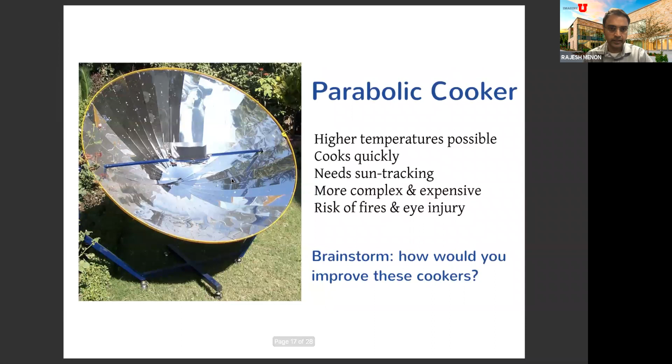The idea is that a Fresnel lens cooker is similar to the parabolic cooker. So if you recall, we had this where you were focusing all the light to the focus of the parabola, which we'll talk about later. Here, the Fresnel lens does the same thing in transmission. So with the parabolic cooker it's in reflection, like a mirror, but here it's in transmission. That's the only difference, so sometimes this is easier to do than the other.

Otherwise, the specifications are roughly the same. You can get very high temperatures very quickly, it cooks quickly, and you need to track the sun again, just like the parabolic cooker. It's relatively complex. I wouldn't call it expensive—these things are relatively cheap nowadays—but there's risk of fires and eye injury.

So I want to spend about 5 minutes or so talking about some basic heat principles as we try to consider some of the technical challenges involved in solar cookers.

Can we use a thermoelectric generator instead of a battery for rotating the motor? Yes, I believe so—anything that can generate power—but that's a good question.

Okay, so the first thing, of course, in a solar cooker is we need to somehow achieve heat gain. We do this with a greenhouse effect. So essentially, sunlight comes through—the visible light, which is light photons with energy higher than infrared—passes through this transparent cover and gets absorbed by this dark pot in this case. Of course, when something absorbs light, it also re-radiates. This is a black body.

You've learned this in high school physics. So this re-radiation happens at longer wavelengths, infrared. Visible will be shorter wavelength, higher energy. Infrared will be longer wavelength, lower energy. We'll talk more about this as we go along.

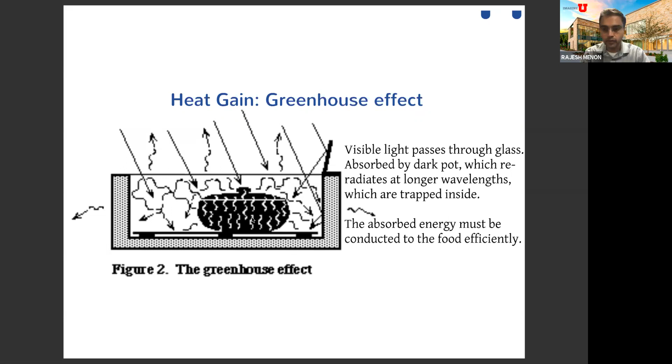The other thing that's important is how the light is entering the system. This can be thought of as heat gain, where the energy is entering this closed system, and the orientation of the glass is important. So if we consider these two situations, one question I can ask you is which box will receive more sunlight? If we were in a class, I'd ask you to discuss, but in the interest of time, and since it's probably a little too simple for you, I'd assume you all know that box 2 will receive more sunlight just because it has a higher...

So the way you should think about this problem is that the amount of light entering the system is defined by the aperture of the system, right? So that's the aperture of the system. Now, of course, there's an angle between the ray of light coming in and the aperture, so you have to project the aperture to be perpendicular to the ray, which will be this line right here, okay? And that will give you essentially a cosine theta factor.

And that was the area that is collected relative to the box here. If you correct for that by actually putting in an aperture, you're essentially collecting more light just because you're avoiding the cos theta factor. So you can kind of see this in this picture.

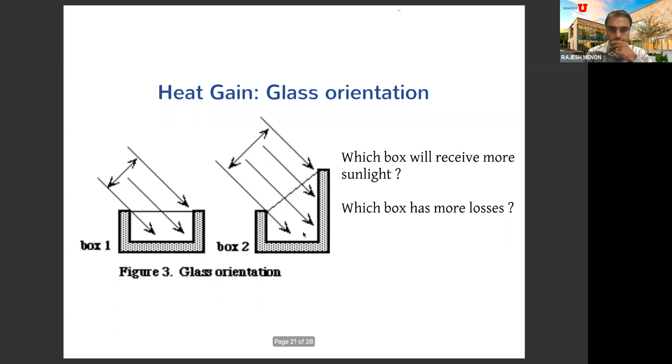By placing a reflector, you're essentially increasing the, let's call it, virtual aperture of the system. So you're essentially getting more of the light to come in, right? That's a little bit obvious if you think about it. And I can put two of these and get even more of the light to come in and so on. So the reflectors essentially increase the effective light capture area of the aperture, okay?

I want to take - well, I'm going to leave this as a homework problem because we have a lot of ground to cover. So one of the brainstorming questions is, think about this concept where you are essentially applying very simple optics like mirrors - just a reflective surface to enhance the amount of light you're collecting. Are there ways you can come up with to increase this gain? I will leave this as an optional homework problem for you to think about.

As I said before, the loss of the system is also very critical. So we have to think about the mechanisms, and there are three as we talked about.

There's conduction. The way you might lose heat by conduction is because this pot is sitting on a plate here, and that's touching the pot. So it's going to conduct some of the heat onto this plate, and if this insulation is not very good, it can conduct it out of the system. That's conduction - when things are in contact. So the absorber plate has to be well insulated from the bottom of the cooker, for instance, to prevent that conduction loss from happening.

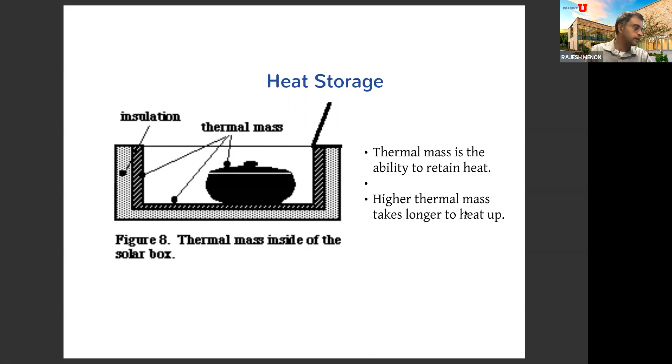The last thing I want you to think about is materials requirements. This is a very simple example, but all these concepts are equally applicable to more complex systems, so I want you to think about it even though it might seem trivial.

There are different ways to think about materials. One is structural materials—how do you hold the whole thing together? Can it be heavy, or does it need to be super light? Does it need to be resistant to water, humidity, snow, or other weather conditions? There are lots of options here.

The other thing is insulation. How are you going to insulate whatever's inside the solar cooker from the outside world? It can't be very expensive, and is it locally available, for example?

For the transparent material on top, you want it to be transparent to visible light but still retain the infrared. There are lots of cheap options—glass might be too heavy, so you might want to use plastics and things like that.

Moisture resistance is very important, because anything humans cook will emit water vapor. So there will be moisture condensing inside this chamber, and you have to make sure that doesn't affect whatever material you're using.

All of this is a highly interdisciplinary problem. As an engineer, you cannot just think about optics by itself—all these other things have to be considered in addition to cost and consumer preferences, when you really want to make something that will be adopted by the world.

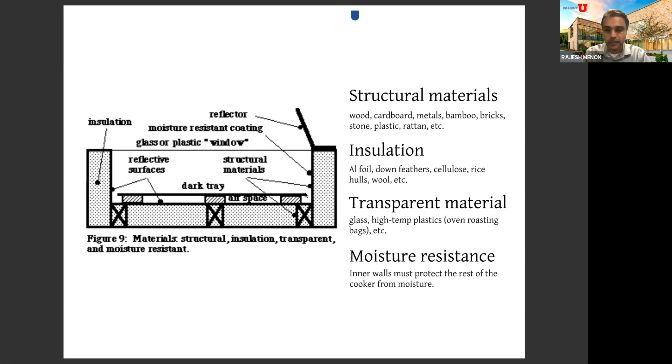There are other considerations outside technical ones too, like size. Is it big enough for the amount of food? Is it for a village, or if it's for a small family, is it portable? Are you going to use it when you go hiking? Are there certain types of cooking utensils or vessels that need to fit inside? All of these things also have to be taken into account when you design such a system.

Sunlight collection area—do you have lots of area? Are you out in the desert, so can you put a collector, for instance? Things like that.

Other questions for you to think about: is a square box better than a rectangular box? If it's a rectangular box, which direction should it be oriented? What about tracking—what is the effect of tracking in this situation? In this case, when I say a box, I'm talking about a solar box cooker.

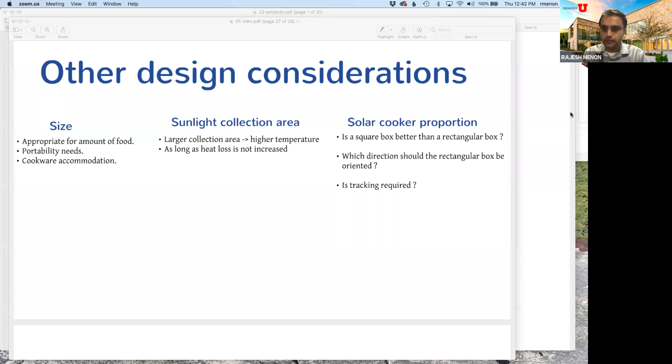Okay, you're back in the main room. Oh yeah, sorry.

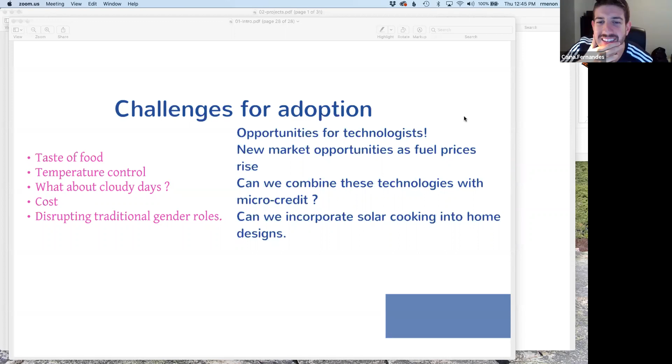Okay, there's a few more people. Okay, I think everyone's here.

So I heard a few interesting comments, which was good, and I'm very glad to hear that everyone was talking. This is very important, especially in a remote situation, because many of you are first-year grad students or starting out, so it's very hard to make these personal connections. This is probably the small thing we can do where you can network, okay? Hopefully folks with similar research interests and so on. So I'm glad that everyone's talking, please try to make the effort.

The second thing I want to say is that I heard some really nice ideas and points, and I'll quickly summarize. I'm very excited to know you're thinking carefully through these. Someone mentioned, maybe there was a question: is the area of the square box the same as a rectangular box? I didn't say anything because I want you to think through it. So let's assume it's the same. If it's the same, then what is the question? If it's not the same, you would pick the larger box to a big extent, assuming you can live with the losses. So let's assume it's the same for the sake of simplicity.

Someone had a really interesting point that if you had a rectangular box, you could align it in the direction the sun is going. During the day, the sun moves in a plane, in an arc, tilted relative to the Earth's surface. If you put a rectangle, you don't need to follow the sun - it will still be more or less pointing into the rectangle for a longer portion of the day. Of course, it would be nice if you could tilt it in the opposite axis based on seasons - in summer it'll be here, winter will be here, and so on. We'll talk more about this later.

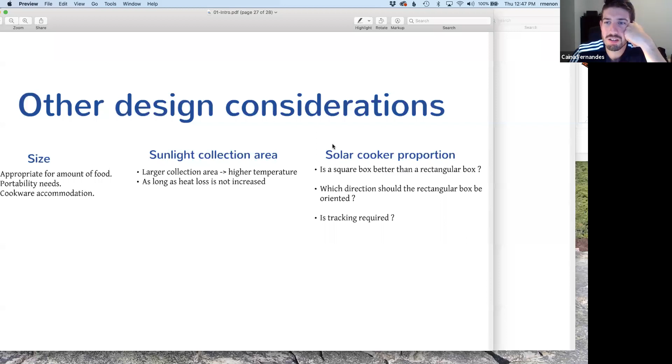I'm sorry to interrupt, there's a note in the chat from Ekata - I think her connection is unstable. Can anyone help improve that? Does anyone else have the problem? At least I'm on campus Wi-Fi, so it should be fine. No, I can hear you well, pretty well. When I go home this might change because my Wi-Fi at home isn't great, so if you have problems just tell me. I'm going to try to plug into my home Ethernet so it should be fine. But Ekata, my suggestion is to try to reconnect or restart your modem. If you still have problems, turn off the video, then I can try to help you troubleshoot after.

So the next question about orientation - I just answered it because it depends on the axis in which the sun is moving. Is tracking required? Of course, if you can track, it's always better because you'll collect more light by avoiding something called the cosine theta error. There's a surface, let's say my hand here, trying to collect sunlight, and this represents the rays of light. If the rays move like that, it forms an angle, and you want to avoid that angle - you want to keep it 90 degrees all the time, which means you want to track. We'll understand this more mathematically later on.

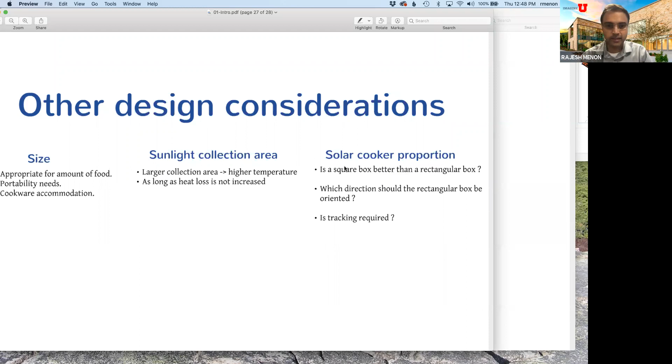Okay, so the last point is that we also need to think very carefully as technologists.

It's important we think about other things as well. Does the food actually taste good? If it doesn't taste good, no one will use it. That's a very important point. But as an engineer, I didn't think about this. Obviously, if I had used it and hated the food, I would never use it again.

Temperature control, someone mentioned last time, so that's obvious. What about cloudy days, cost?

Now, disrupting traditional gender roles is a very important point actually. The only reason I'm pointing this out is because solar cookers are very common technologies that non-governmental agencies try to deploy around the world in developing countries. Unfortunately, it also tends to cause cultural shifts, because traditionally women are the ones who cook. If you free them from cooking, and the cooking is done automatically, for instance by a solar cooker, that disrupts these traditional gender roles, which can be a great thing. Of course it gives you gender parity and so on, but it is a problematic thing in many cultures. So this is not something we as engineers think through carefully.

I'm just pointing this out as something very interesting that I never thought about, but something we should think about if we really want this to be widely adopted.

On the flip side, of course, there are huge opportunities for us as engineers. There are new market opportunities as fuel prices rise. Think about ways to combine these technologies - and when I say these technologies, I don't mean just a solar cooker - with things like microcredits or innovations in economics and so on. I'll come back to this again and again.

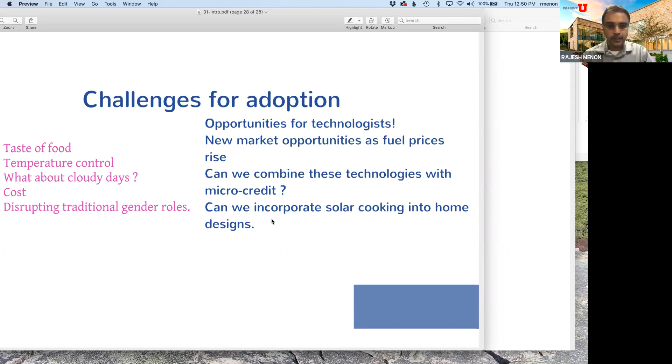Okay, let's move on to today's actual lecture. So, just wondering, what is microcredits?

Oh, great question. So I'm not an economist, but I'll give you my naive understanding. Very, very small loans provided typically by non-governmental organizations to small villages and artisans and so on. The idea is that it allows folks to be entrepreneurial, start their own companies, create jobs, produce economic activity, and then pay back the loan. Typically the loan is at a lower interest rate, a relatively small amount, and it may be forgiven and so on.

One example I've seen work very nicely, in Africa for instance, is where people have used microcredit to purchase small solar panels, and then they use it to run a business charging cell phones. In many places like Africa, there's not enough infrastructure, so cell phones are basically the backbone of the economy, used for making payments and so on. Everyone needs charging, but there's no electricity, so someone has a small business where they put a little solar charger and charge a price for someone to charge their phone. That's an example - very small projects is what it comes to.

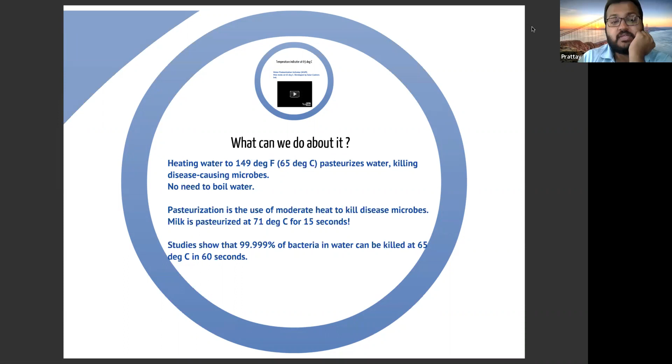And then you need to cool it down, so you need to drink it. Yes, good point. Anything else? I would assume it'd be hard to maintain a consistent temperature of 65 degrees if you're doing large volumes of water. It seems like something that would work best with smaller volumes. Yes, good point as well.

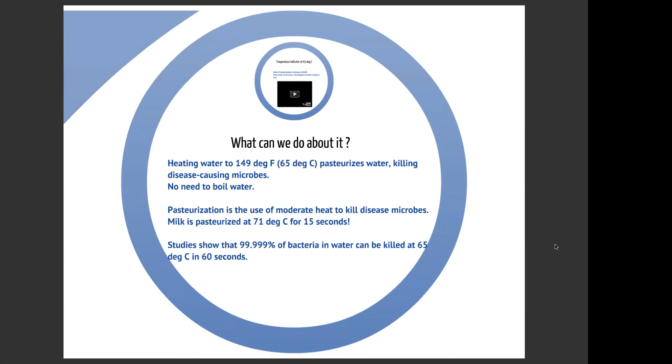Proper temperature is in the chat from Ekata. Okay, good. Yeah, so I think you guys are on the right track. But let me ask you a little bit of a common sense question: how do you know when you've reached 65 degrees? A thermometer, but not many people have access to one.

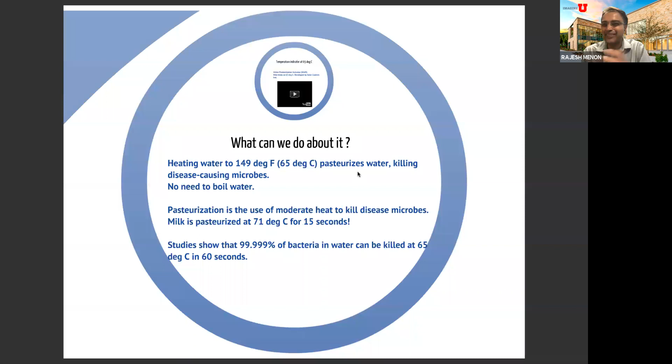Exactly. This is a problem, by the way, I did not think of myself either, but if you were a poor person in a developing country without access to water, and if I told them to do this, that would probably be the first question: how do I know it's hot enough, that it's long enough? So I'm going to show you a very simple solution that someone came up with to this problem. Think of this as a paradigm, an example for the way I want you to think.

It has nothing to do with optics, but I'm just going to point it out as a solution. It's called a water pasteurization indicator. So I have to now play a video—let me open it up, hold on. I'm going to turn up the volume because you couldn't hear it last time.

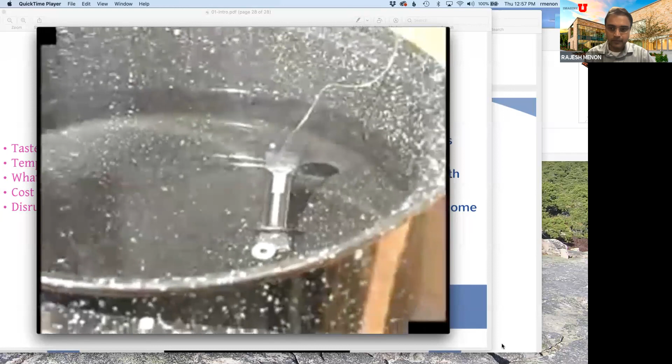The WAPI, or Water Pasteurization Indicator, is a simple device that indicates when water has been fully pasteurized. A plastic vial with wax on top and a washer on the bottom is placed in the middle of the pan. When water is heated to the pasteurization point, the wax melts and drains to the bottom of the vial. When cooled, the wax hardens again, and the WAPI can be turned over and reused again and again.

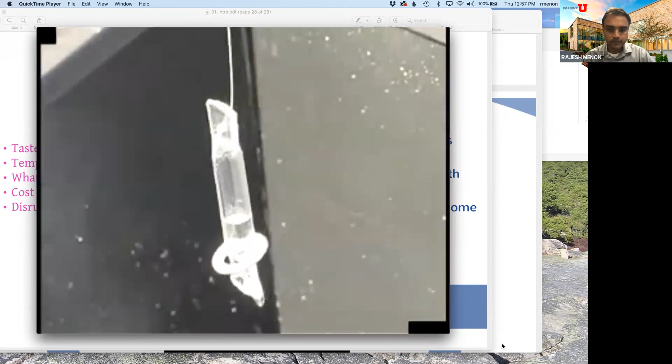Okay, so you guys see it's just a piece of wax, but it's engineered such that it will melt at that temperature. It's typically colored, so it just becomes colorless. You maintain it, and then you can reuse it. It's very cheap—it uses a washer to weigh it down. Very simple. This is the sort of innovation which can actually change the world, because it's simple, cheap, and everyone can use it.

Okay, so let's go back. And I personally like very simple things like this.

What about just boiling it? So you don't need to pay extra attention or buy extra measuring devices—you just boil the water. It's a lot more straightforward.

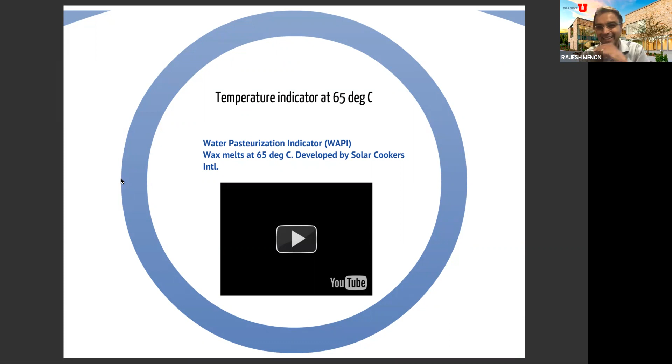Yeah, so this is a first world solution. Think about how much fuel it takes to boil the water versus how much fuel it takes to heat it to 65 degrees—it's a big difference. That means you need a lot more fuel in order to boil the water. So certainly that works, but it's overkill. It's very expensive, right? That's the way to think about it. I mean, it depends who you're talking to, obviously, but it's a good point.

What other things can you do? Of course, you can use a solar cooker. And there's a custom device. So I'll play a couple more videos. Again, my goal here is just to give you a range of what people are already doing.

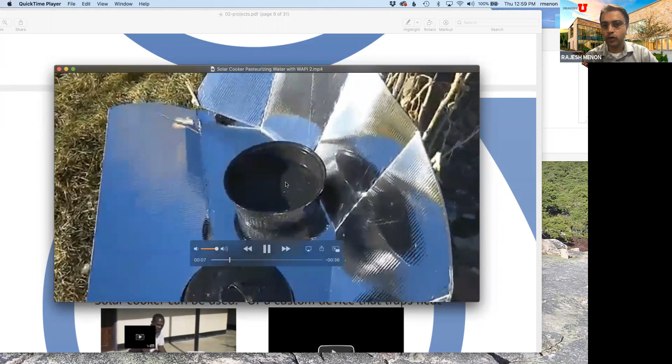Let's play the first one with simply using a solar cooker to get the water to be the temperature you want, which is very simple. Okay, you guys can see that, right? It's the same kind of panel cooker. You put the water in the focal plane. You put the WAPI in there.

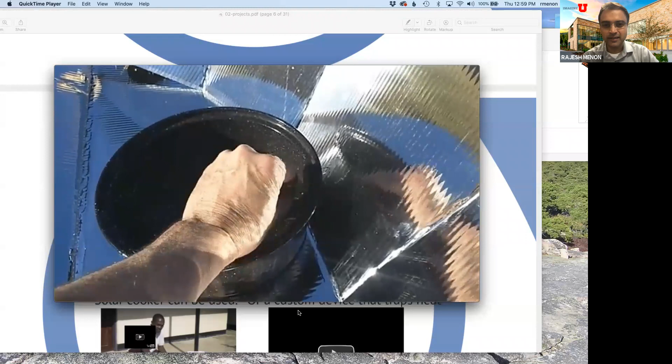There's the WAPI. It's got a color in it, so it's easy to see. And when it melts, it just goes down. And you ensure that it stays down there for 60 seconds or whatever time you need it to. Now it's hot. Okay, so you get the idea.

The other concept is perhaps even simpler. This is a very simple product called AquaPack. So I'll just play that.

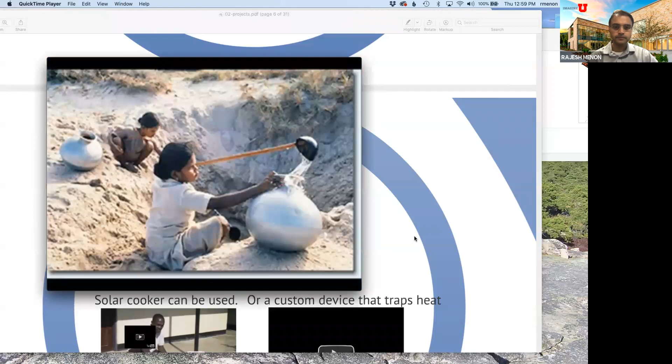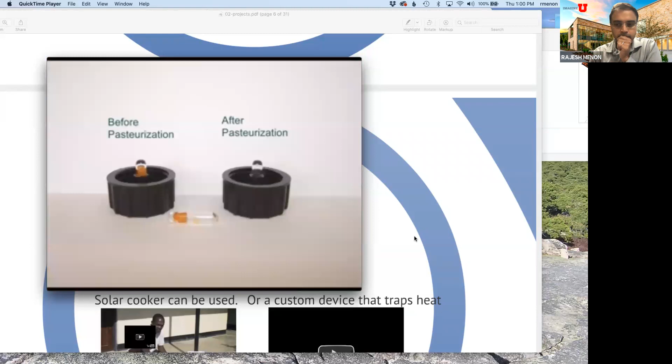Over 1 billion people are exposed to biological pathogens in the water they drink. The AquaPack uses solar energy to kill these pathogens using the proven process of heat pasteurization. Simply fill the AquaPack with up to 4 liters of water, place in direct sunlight, and observe the orange water pasteurization indicator. After a few hours, the orange color disappears, indicating the pasteurization temperature has been reached and the water is safe to drink. The AquaPack can be inexpensively manufactured in developing countries for about $2 each, providing both jobs and safe drinking water.

Yeah, so you have that idea. There's an even simpler solution, and this is the last video I will show. Let me just play that. It's only a couple of seconds. It's actually interesting. And then maybe we can discuss. Oh, I don't have it here. Hold on, sorry. Let's see, it should be here somewhere. Okay, last one. It's 2 minutes.

I'm so thirsty. Oh, no, don't do that. That water will make you ill. Yeah, she's right. I've got a better way.

By the way, hopefully it gives you some ideas when you do your own video.

Okay, it's really simple. You get a plastic bottle that's clear, fill it with water, and put it in the sun. How does it work? Well, the UV rays and the heat from the sun kill all the germs which make you ill and get you sick with diarrhea. What equipment do we need? Just a regular plastic bottle that you've cleaned out and filled with water. But how long does it take? Okay, you leave your bottle outside all day, and you can make it even quicker by using a shiny surface to reflect more light, or putting it somewhere dark to absorb more heat.

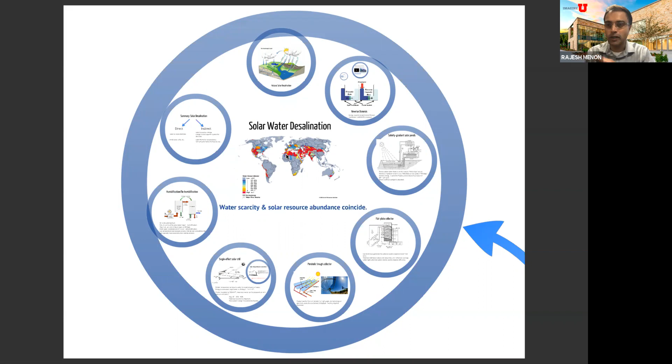Water scarcity and solar resource abundance coincide. In other words, sunlight coincides with places where there is less drinking water. So can we take advantage of this? That's really the motivation.

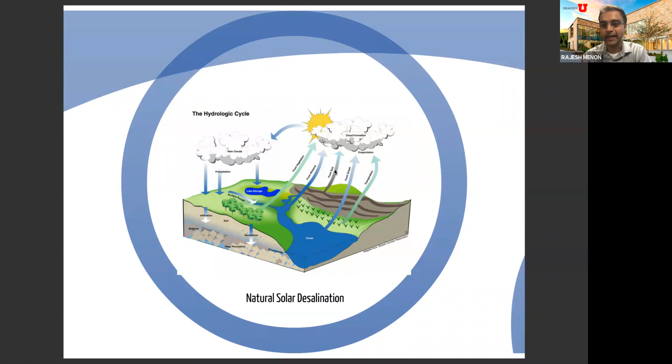Now, nature already does this for us. In the natural hydrologic cycle, it's a natural solar desalination: water from the ocean evaporates up into clouds, the clouds move over land, and it falls down as fresh water. This process leaves all the salt behind, and that water is drinkable. So that's exactly the process we want to do artificially, with high efficiency, hopefully. Everyone knows this.

Now, there are many ways to remove salt from the water. We can use something called reverse osmosis. This is the most commonly used technology today in industrial water desalination. If you go to the plant in San Diego, for instance, this is what they'd use. The idea is simple: imagine two cylinders connected by a membrane. This membrane is permeable to water, so water can flow, but the salts cannot. The pores of the membrane are small enough that water molecules can flow through, but it prevents the salt from flowing through. The blue is salt solution.

If you don't do anything, osmotic flow means water will flow from the clear side to the salty side—that's pure diffusion, what we call osmotic flow. This is exactly what happens if you open a perfume bottle on one side of the room: eventually the perfume molecules reach the other end. We all learned this in undergraduate or high school physics.

We want to do the opposite—we want to go the other way. By the way, this occurs naturally, which already gives you a hint that it's obeying the laws of thermodynamics, because it happens naturally. So when you want to go against thermodynamics, you have to do some work. That's what's happening on this side: reverse osmosis.

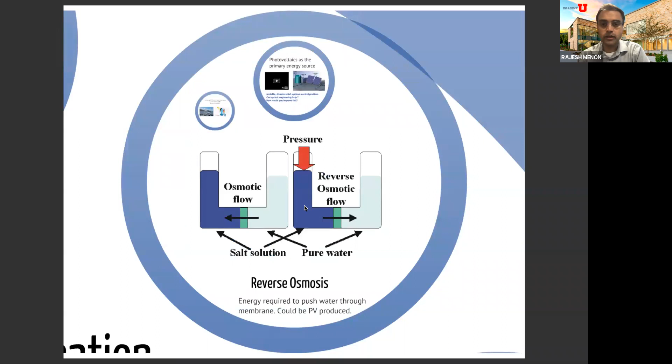What's important is that pumps operate most efficiently at a fixed speed. Unfortunately, photovoltaics do not produce fixed current, because sunlight shifts when it's cloudy—if a cloud passes overhead, the current will fall. That's not great for a motor, because the motor can't go up and down. Just like when you drive your car, you don't want to change speeds rapidly; you want a steady speed for very efficient operation.

It turns out to be a controls problem. So for those of you who are electrical engineers, you can appreciate that this is a controls problem because you have to see how much power is coming from the panels. You want to make it match the ideal optimal operating point for a motor.

You can think about other ways you can use optical engineering to help, and how you would improve it. I won't break you into breakout rooms yet at this point. We'll come back to this later on, but let me just check the chat. Okay, I don't need to look at that. Let's see. Okay, so I guess I skipped that video, so that's fine. Let's keep going and we'll come back to that point.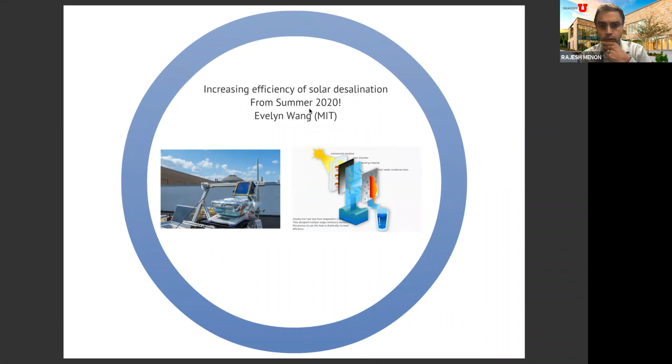Great, oh yes, I wanted to show this next. So there is another really interesting technology from Evelyn Wang's group at MIT that was just demonstrated about a month or two ago, this summer. Let me zoom in here. So this is what the system looks like. Let me explain what's happening, okay?

So you have sunlight coming in. You have a transparent insulator here, which is trapping the light, trapping the heat. So basically this is like the greenhouse effect. You have a black heat-absorbing material which absorbs the light and converts it into radiant heat. It emits infrared light onto this wicking material. This simple wicking material pulls up the dirty water, and the water is heated up by this radiant heat.

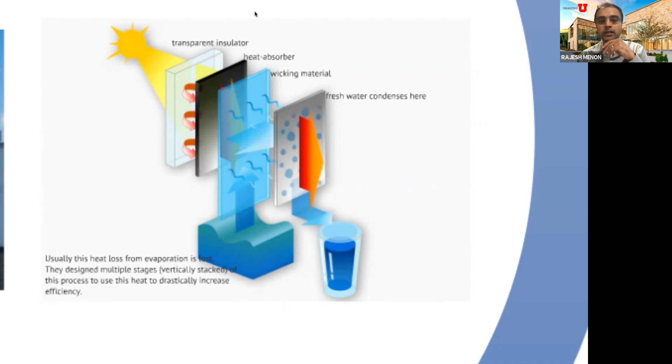It evaporates, condenses on some surface, flows down, and you get clean water. Now what they did was very clever: when this water evaporates, it is absorbing heat, but when it condenses from steam to liquid, it's losing heat. That heat is usually wasted in typical systems. Here, they're using that heat in multiple stages that are vertically stacked, which you cannot see here.

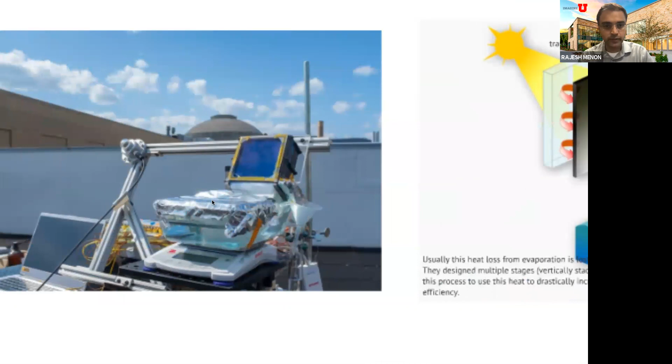But I'll play a short video just to illustrate this point. That's the video of their system sitting on the roof of a building. So let me just play this.

This is called a solar still, because it works not by the membrane method, but simply by evaporating the water, just like the natural hydrologic cycle. This example is from the group in China as well, Shanghai Jiao Tong. Here you can see the fresh water starting from the first stage, then the second stage, then the third stage, and so on. You can see the sunlight, and the wicking material is here.

Eventually all of them pass through, and if I play this, you can see this is the steady state, which means all 10 stages are producing water at a fixed rate. Of course, this is sped up as you can see.

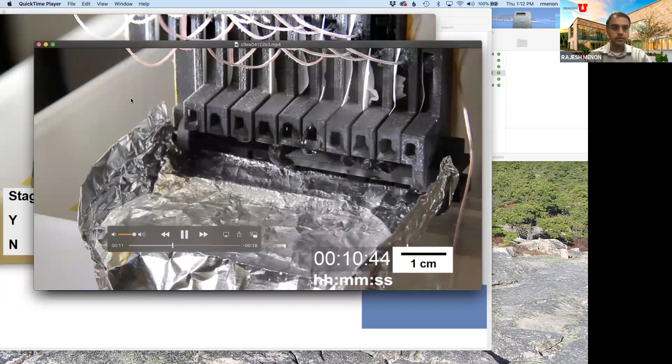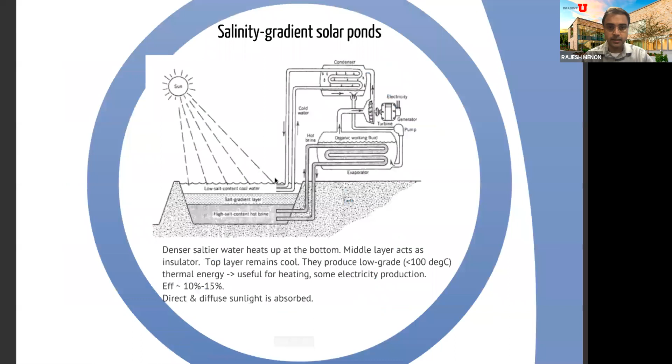Now, you can also have relatively low-tech solar stills, and that's what this is. You can simply build a pond, called a salinity gradient pond. You have salty water here. The high salt content brine gets hot and sinks to the bottom, while the low salt content cool water remains on top, with a salt gradient in between acting more or less like an insulator.

What happens is you can use this hot part of the brine to heat. The hot brine is pumped through an evaporation system, while the cold water passes through a condenser system. So you have an evaporator and a condenser — it basically acts like a refrigerator. Now you can run what's called a heat engine.

In this case, you have a working fluid which gets hot here, then goes through the condenser, gets cold, and cycles through. So there's a hot region and a cold region. As the liquid passes through this turbine, you can generate electricity, for example. So you potentially get clean water and electricity at the same time. Now, this is relatively low-tech, and we'll talk more about this idea of the hot part and the cold part, because that's required by thermodynamics for something called a heat engine, which we'll discuss more later.

The efficiency is relatively low, 10 to 15%. Both direct and diffuse sunlight can be absorbed. Direct means there are no clouds, diffuse means it's cloudy, and we'll talk in more detail about this in the next few lectures. Okay, so we saw this, I'm going to skip that.

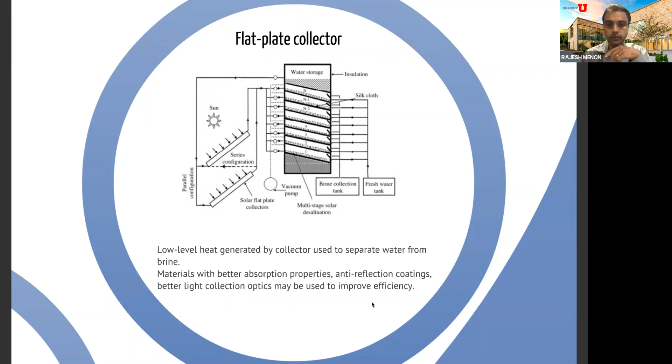Then you can essentially evaporate the water out of the brine and collect the clean water. I won't go through the details here, but it's basically the same system as we talked about before, slightly different configuration. Of course, you can speed this process up by using optics, and this is what we are interested in.

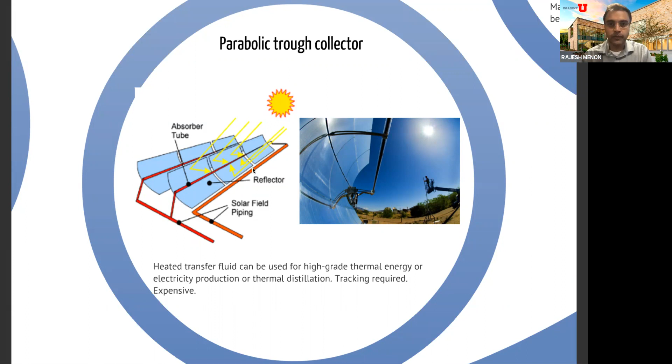This is okay, so here's an interesting problem that I'm going to break you out into different rooms to discuss, okay? So let's go through this problem carefully so you can understand it. First of all, let's see what this is.

The energy required to evaporate 1 kilogram of water at 30 degrees Celsius, let's say that's room temperature in the tropics, is about 2.4 times 10 to the 6 joules. That's the amount of energy for 1 kilogram of water. What does that mean? If you have a kilogram of water as a liquid, the amount of energy I have to expend in order to evaporate it, starting at 30 degrees, taking it to 100 degrees and allowing it to evaporate, is 2.4 million joules, 2.4 megajoules, okay? I assume everyone knows the units and so on, right?

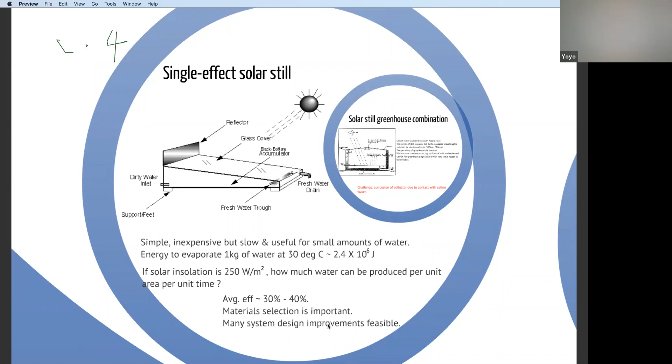So let me see if this works, hopefully. We know we need two... this is very slow, never mind. Maybe try the annotation. Yeah, I was trying, but it's too slow for my iPad. Let me close it, sorry, it's not showing up properly. Hold on, I gotta... we're working through technical issues. Or you can open a Word document and just type it in. Yeah, it's fine, I have a solution, I just need to do one thing. When I do an AirPlay to my iPad it really slows down the computer, so I just need to disconnect it.

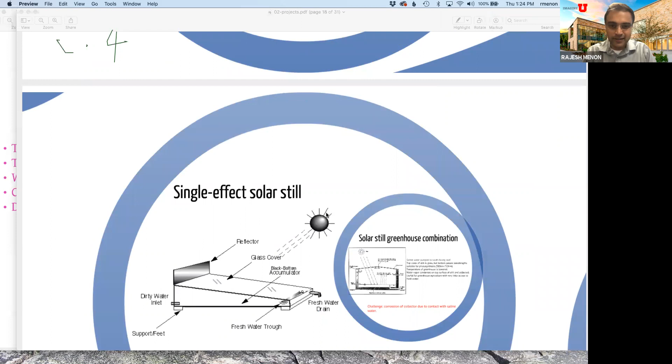Okay, we're back. You can see this still, right? I hope. Yes. Well, it's still very slow, sorry, I don't know why, so I guess I'll just talk, we can just talk through it. So of course... your slides are stuck, I think, or I don't know what you're doing. Yeah, I'm just putting this in place.

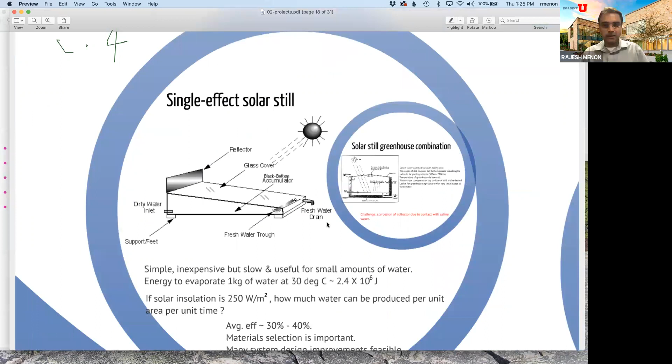I'm gonna hook up to the internet just in case that's the problem. But okay, so you can see you need 2.4 times 10 to the 6 joules, and you're getting...

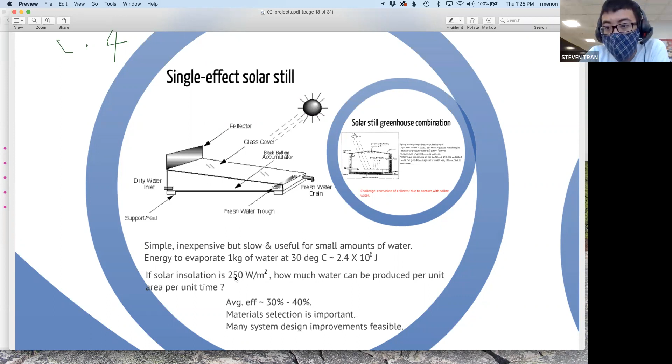Hello, you got disconnected maybe? Yeah, cut off a little bit. I think, wait, I'll just text you on Slack, I think he got disconnected or something. I'm still here, can you hear me? Just one, okay, yeah, just all right. I felt the U Wi-Fi was better. Before you said you're gonna connect to your family Wi-Fi, but that U Wi-Fi was actually more stable, you got stuck less. Yeah, I'm on campus, I'm actually in my office. So it's still the same.

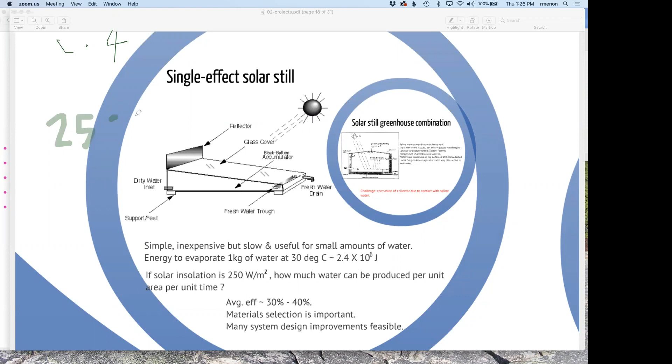In any case, let me just get to this. It's just my computer really slowed down when I connected to the iPad, which I should not do. A lot of my other professors have been using Google Keep to just scribe notes, they just open another tab. Ah, okay, I'll give that a shot.

So you can see that this is watts per meter squared, simply joules per second per meter squared, right? So if what you're getting is 250 joules per second per meter squared, and what you need is 2.4 times 10 to the 6 joules, then you take 2.4 times 10 to the 6 joules divided by the rate at which you're getting that, which is 250 joules per second per meter squared, and you have to take the inverse of this, because eventually what you want is kilograms.

Oops. So I forgot that this 2.4 is per kilogram, right? So what the answer you are looking for is how many kilograms can I get out of 1 meter squared per second. So you have to take the inverse of this, right? Then the joules cancel out, and you'll get kilograms per meter squared per second. So essentially, the amount of energy you need divided by the rate at which you're getting the energy, take the inverse of that, and that will be the amount of water you're creating.

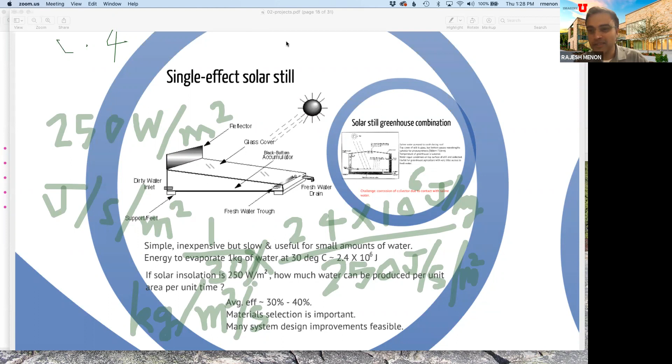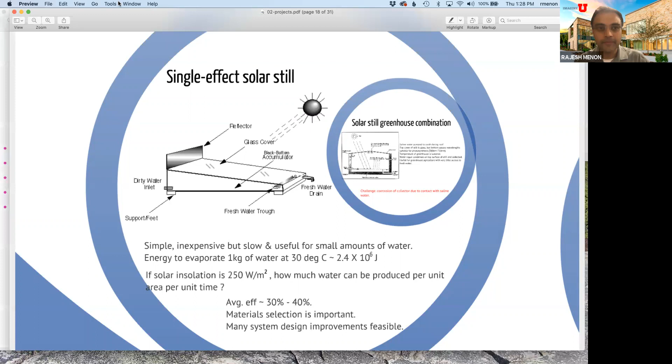That's why I said in the beginning, you can just assume 100% efficiency for this. So in this class, we will do quite a bit of hand-wavy math, because we want to get a quantitative, a qualitative picture of what's happening. So I want you to understand, okay, is it a lot of water? Is it a little water? Is it medium-sized water? That kind of answer.

Which, by the way, I should also make a quick point: in the exams, especially, even if you don't get the final answer right, it's much more important that you show how you approach the problem. Which I think you know, in most classes today, that's what you do.

But just want you to be aware of that. You can think of the materials as important in this kind of system because you're handling water and steam and so on, right?

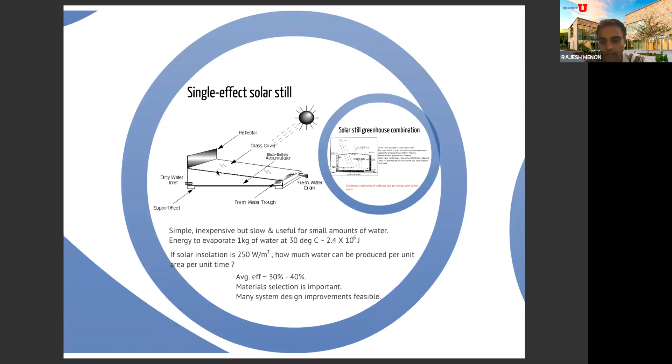Many system design improvements are possible. You can also have different configurations. This is a greenhouse-like configuration, exactly the same technology as before. Water just evaporates, condenses, collects in a trough here. The key challenge here is that the corrosion of the collector is due to contact with saline water. So keep in mind that this water is touching all these surfaces, and salt water, as we all know, can corrode surfaces. So you have to be aware of that when you design systems like this.

You could also think about the humidification-dehumidification problem, which is related to this. You can have a solar collector which is collecting sunlight. Dry air comes in, and you pass it through a humidifier. Brine comes out in this example. This is preheat, so in this case there's preheated seawater going in here. Warm humid air is then passed to the dehumidifier, where the cold seawater comes in, the fresh condensate comes out, air comes out, and the cycle repeats.

You can see the air is this red arrow, which goes through this cycle. This is the water, arrows in green, follows this cycle, and the fresh water comes out here. Exactly the same principle, right? You're simply heating up the water, condensing it, and getting the fresh water out. So again, another way to think about this.

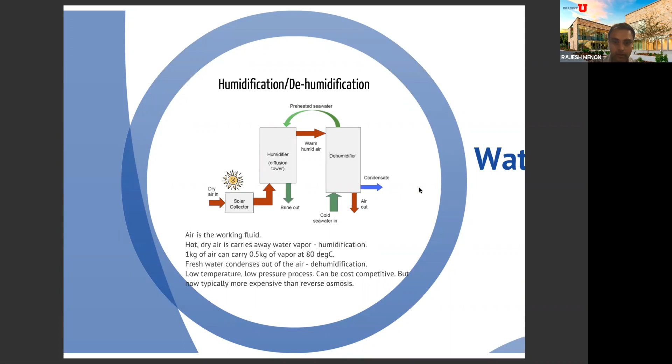To summarize what we've discussed so far, we've thought about solar desalination in two aspects. One is direct sunlight, simply using solar sunlight to create distilled water, which is fresh, at small scale, stills, etc. Or you can have indirect, where solar is used to produce energy, in the case of photovoltaics for instance, and that energy is used to operate something to separate water from the brine, whether it's reverse osmosis or simply heating the water. Solar thermal, photovoltaics, humidification-dehumidification - lots of options, right? In all of these, of course, you can apply optics, because you're collecting light to do something. So optics can always be applied to do something better. That's where our role comes in as well.

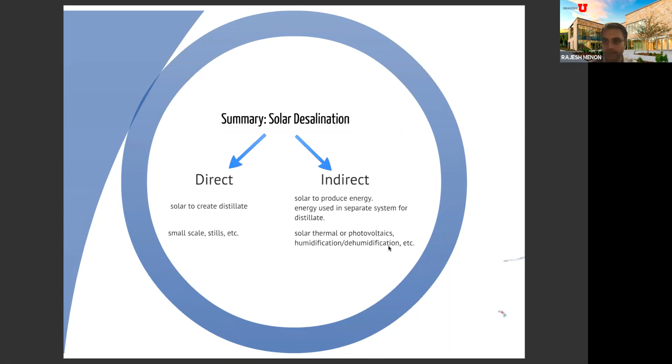The next topic, the third topic I want to talk about, is solar refrigeration, which is a little bit of a misnomer if you think about it. In sunlight, things heat up - how do you cool things down? But you can imagine this is a very important problem, because you want to keep food, medicine, things like that over long periods of time. One of the big challenges, for instance, with the COVID vaccine, is how do you deploy this around the world, especially because vaccines have to be refrigerated. Lots of the world doesn't have access to electricity, so how do we solve it? It's a very, very pressing problem today. You can also think about, can we make ice, and so on.

In order to really answer this question, we need to understand something called vapor compression cooling, which is how our fridge works. Many of you probably already know it, but let's watch a quick video just to recap this concept. I'm just going to play that very quickly.

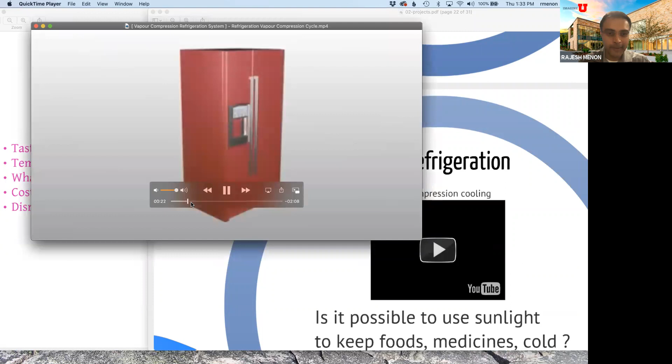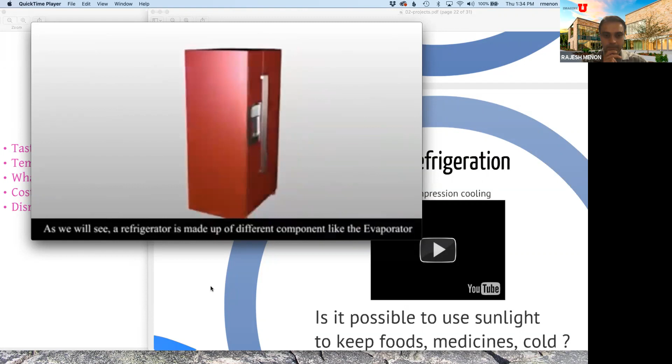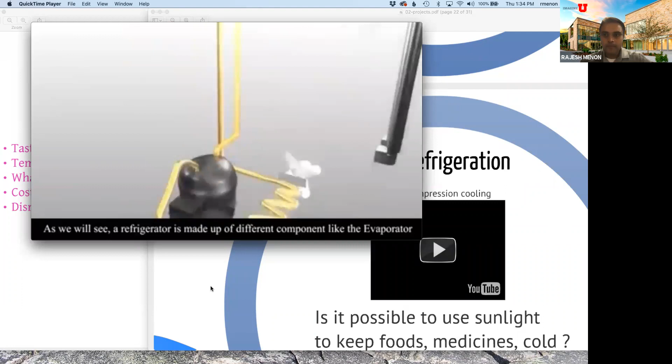The compressor compresses the refrigerant, which is ammonia gas, shown in blue color, and as the gas is pressurized, it heats up, shown in red.

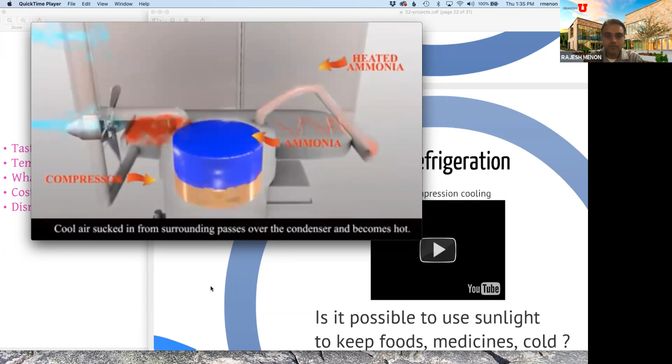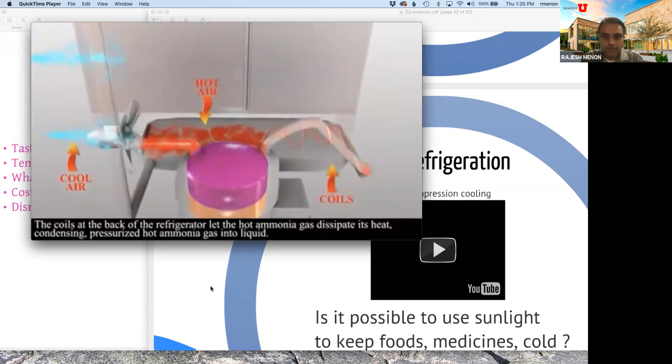Cool air sucked in from the surroundings passes over the condenser and becomes hot. The coils at the back of the refrigerator let the hot ammonia gas dissipate its heat, condensing the pressurized hot ammonia gas into liquid.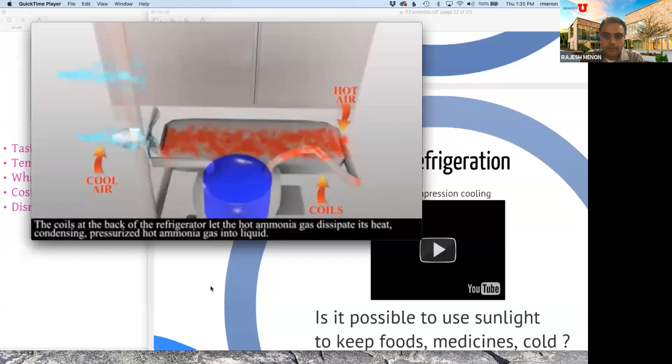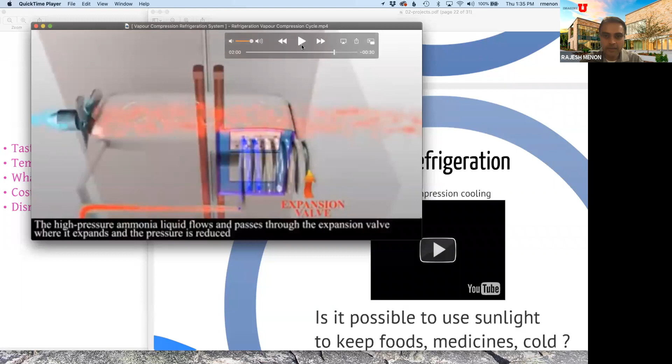The high-pressure ammonia liquid flows and passes through the expansion valve, where it expands and the pressure is reduced. Quick point here: the liquid is expanding and becoming a gas. When liquid becomes a gas, it's taking energy from the surroundings, because the gas has more energy than the liquid. When it takes energy from the surroundings, it cools the surroundings. Keep that point in mind. And the pressure is reduced.

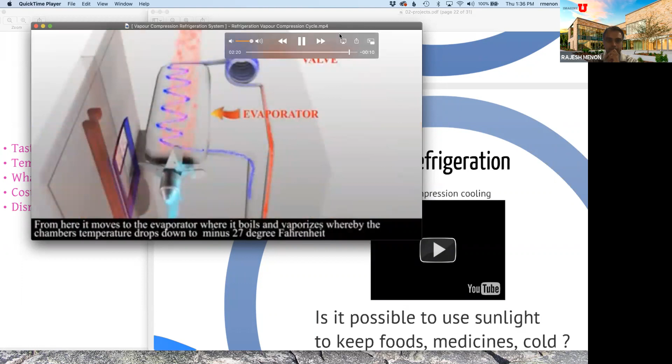From here, it moves to the evaporator, where it boils and vaporizes, whereby the chamber's temperature drops down to minus 27 degrees Fahrenheit. The ammonia gas is then sucked by the compressor, and the cycle repeats itself.

So let's come back to this, so you can kind of see what needs to happen. You need to have a compressor, and you need to have a pump, and that's it. Those are the two areas where you need to expend energy. Everything else is natural. So you need to pump the liquid, then compress it, then allow the gas to expand. That means you need two places where you need to put energy.

You can, of course, use photovoltaics to produce that energy. That's the obvious thing—put a solar panel, use sunlight, run a DC motor which does the compression. Here you can see the heat coming into the evaporator, and at the condenser, the heat is output to the ambient, and inside it's colder.

Of course, the challenges are you might need a grid connection because you want it to work at night, for instance, or you need a battery. The other thing is, like we talked about before, motors work most efficiently at a fixed rotational speed. With sunlight, if you have cloudy days and so on, the motor speed can change rapidly, so it's not very efficient. So you need some control electronics there. The efficiencies are not bad—about 30%—but they can be expensive.

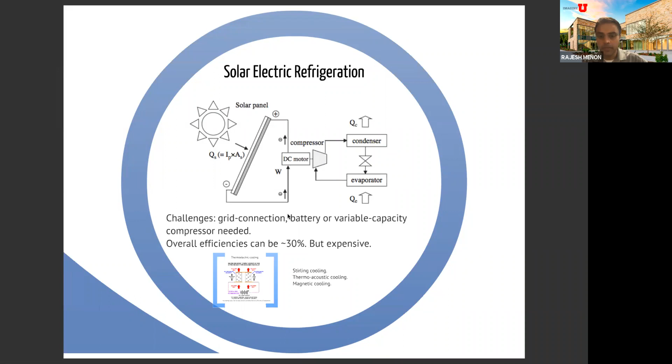There are other approaches as well. One is based on thermoelectric cooling, which has nothing to do with solar, but I want you to be aware of it because thermoelectric cooling is very important in space. When you think about the Mars rover out on Mars, in the Martian sunlight it can get very, very hot, and you cannot run a compression engine. So you have to have a solid state, very lightweight refrigerator to keep the electronics cool, and this is how it's done—using a solid state device, essentially something called the Peltier effect, which takes an N-type semiconductor with a P-type semiconductor.

Hopefully those of you who are electrical engineers know this, but an N-type semiconductor has an excess of electrons, while a P-type semiconductor has a vacancy, a lack, of electrons. There are more electrons here, and they flow in a certain fashion, releasing heat on one side. You apply a voltage, so the electrons flow to the positive terminal, pass through the N-type, release the heat, and then come back—there's a connection here, comes back here, goes this way.

So the holes flow the opposite way—a hole is an absence of an electron. This flow essentially means the electron absorbs heat from one side of the Peltier device and rejects it on the other side. So just like we had the compressor and the condenser, the Peltier device has one region where it absorbs heat and another region where the heat is released.

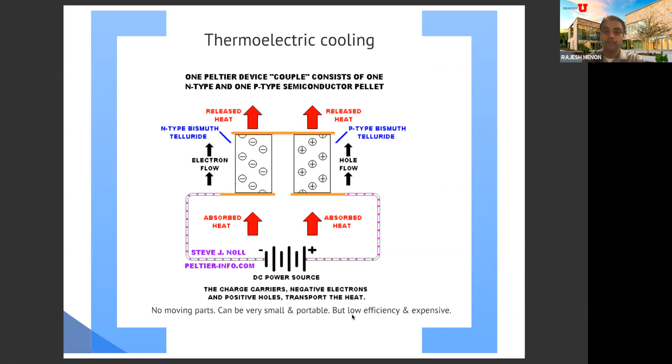Of course, because there's no moving part here, this is completely solid state—very small, portable, but relatively low efficiency and very, very expensive. But if you're sending something to space, you don't care about the cost, you care about the weight. So that's important. There are other technologies we won't talk about too much.

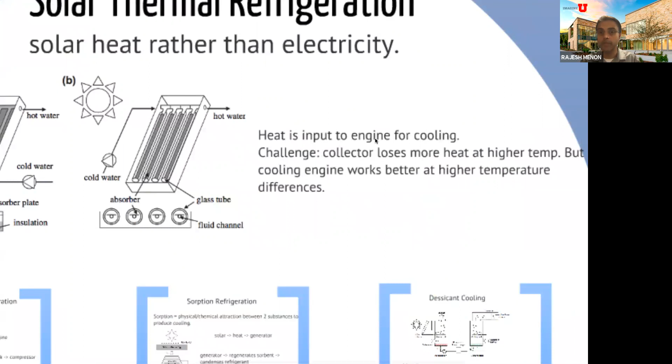Solar thermal refrigeration uses solar heat rather than electricity directly. This can be done in a variety of ways—for instance, with solar collectors running a fluid, then you can run a heat engine with it. Basically, we think of heat as an input to the engine for cooling. Engine here refers to something like a compressor, anything that can do work.

There are many challenges here. One important thing to think about is that the collector loses heat at higher temperatures, but the cooling engine works better at higher temperature differences, which we will see when we talk about thermodynamics. So these are two opposing requirements—one can work against the other.

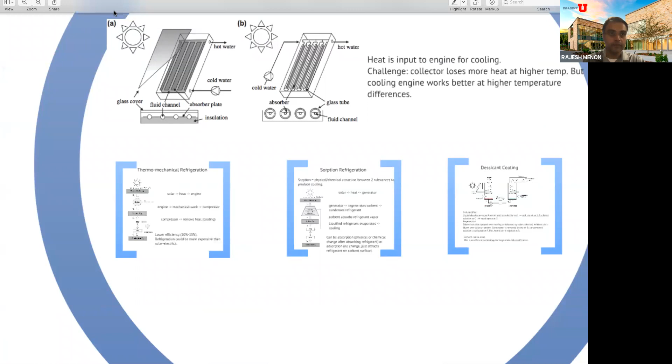So this is thermomechanical refrigeration, where again a solar collector creates a hot region of the heat engine. This is the hot part of the engine, and this is the cold part, which is the ambient. The difference is the work, which is then used to run a compressor. This is what's referred to as a heat engine. We'll talk much more about it next week, or actually the week after next.

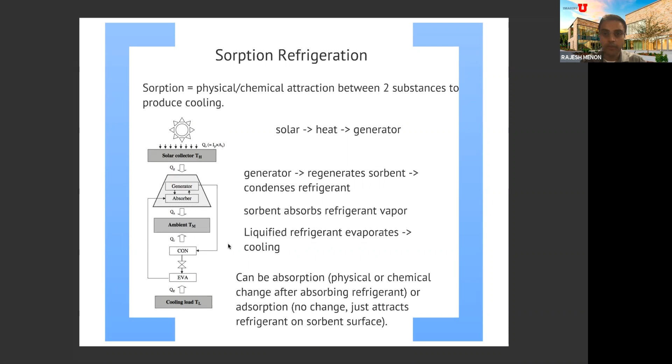It's relatively low efficiency, 10 to 15%, so something to be aware of. There are other approaches which aren't terribly important for us. I'm just leaving that for additional reading for you. It's less important for us.

Oh yes, so this is my last slide, and I want to make sure I have a few minutes to do a couple of polls.

The whole purpose of today's lecture was just to give a quick survey to give you ideas on what you would like to work on as a team project. Again, this doesn't mean you have to pick any of these—I'm just giving you ideas to think about. Some of you already responded to my email about requests for team members and so on. If you have preferences, please let me know.

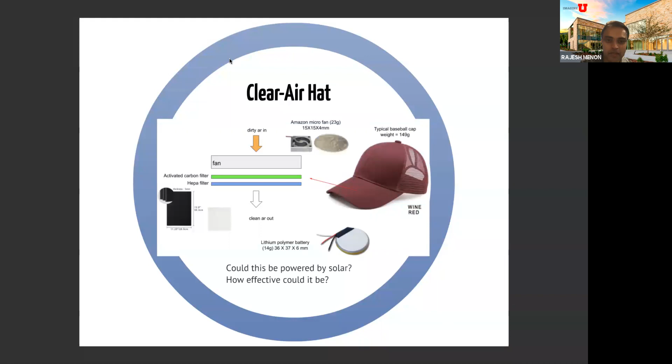Okay, I'm going to stop here. By the way, I can share the results—great, we have lots of hands-on folks. That's fantastic, I hope you have a garage where you can make some stuff. Okay, I'm going to stop here and ask if there are any questions.